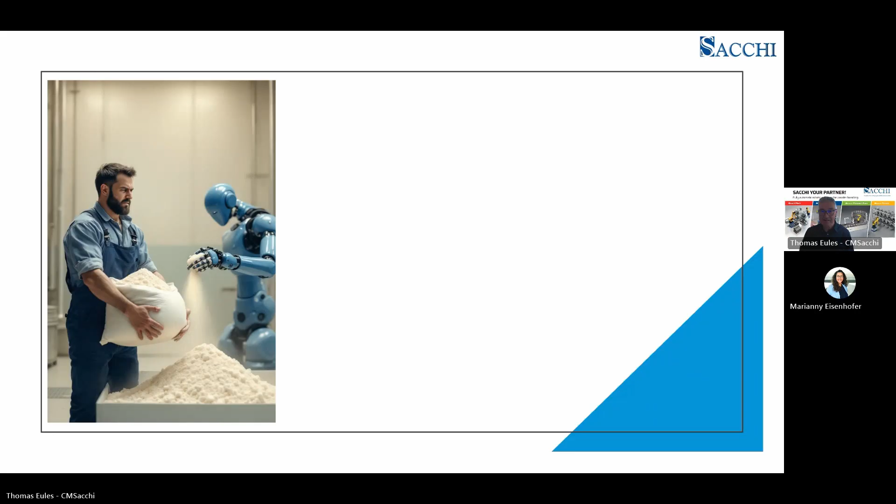Okay, thank you for this introduction. I want to share my screen. Is my screen visible? Is it fine? Can you see my screen? Perfect. We can see the screen. Okay. Thanks. So a very warm welcome also from my side.

Our topic today is AI and robotics in powder handling, from a manual process to a smart factory 4.0. I want to show you how a manual process can go into an automatic process and smart factory 4.0. But first, let me introduce myself a little bit. My name is Thomas Eules. I am business manager at the company Sacchi. I have worked more than 25 years in planning and implementation of process engineering projects in the field of bulk solids.

And let me also introduce the Sacchi company. We are a family business since 1926, so now we celebrate our 100 years anniversary. Now we are in the fifth generation of a family-owned business, so we're very proud. We have specialized in innovative robotic solutions in the field of bulk material handling for over 20 years. We develop, implement, and optimize turnkey plants for the bulk solids processing industry.

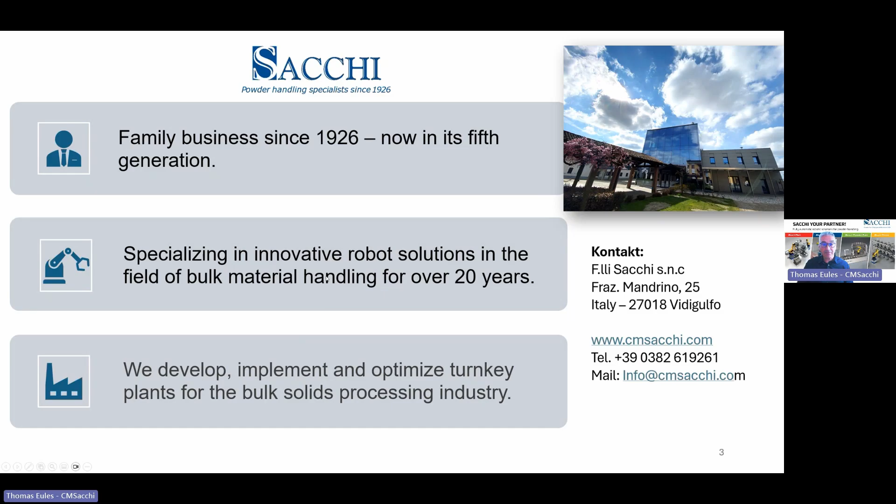Here we have four core systems where we work with robotics. First is Smart Pick: we empty bags automatically. We have a system, Smart Pack, where we can fill bags automatically and palletize in one system. And we can also deal with minor ingredients, micro ingredients, with the systems Smart Powder Flex and Smart Tipping by using our robotic systems.

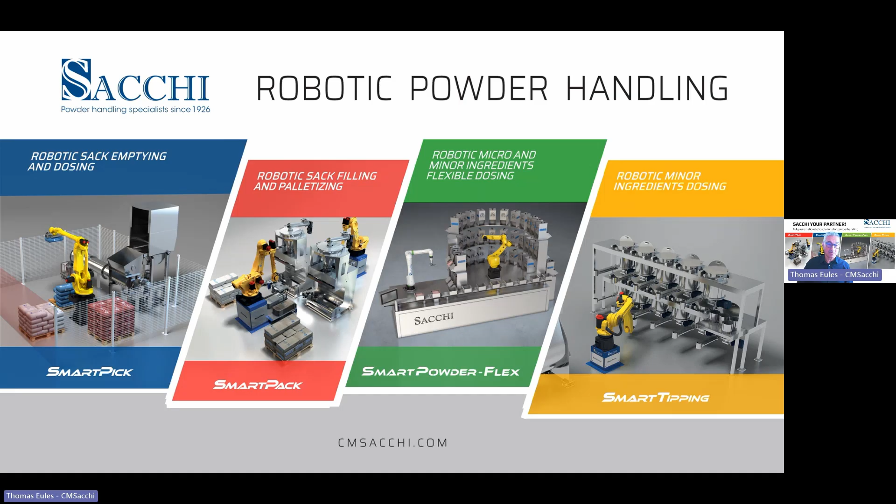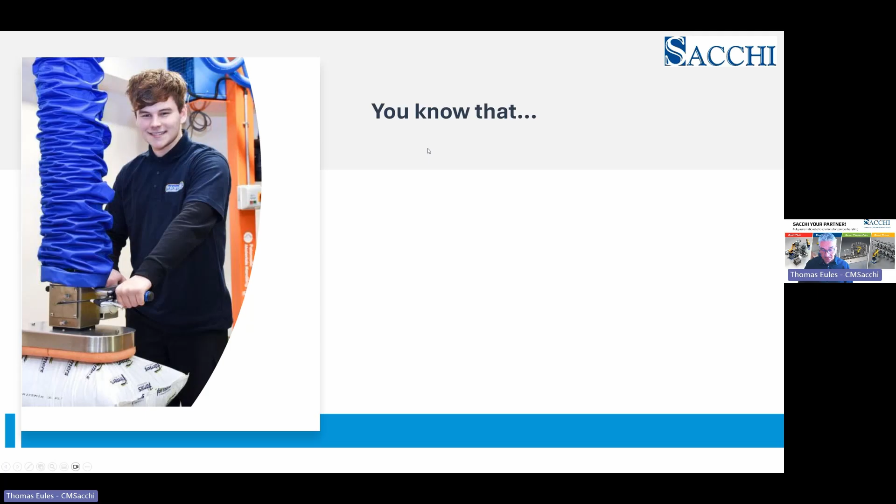But now, efficient and safe powder handling is a major challenge in many industries. Today, I will demonstrate how Sacchi can bring you to Factory 4.0, and we want to use a real application example for a fully automated mixer feeding and mixer emptying. So that is, I think, what everybody knows here. The automotive industry is mostly fully automated. We have halls, sometimes completely dark, to save energy.

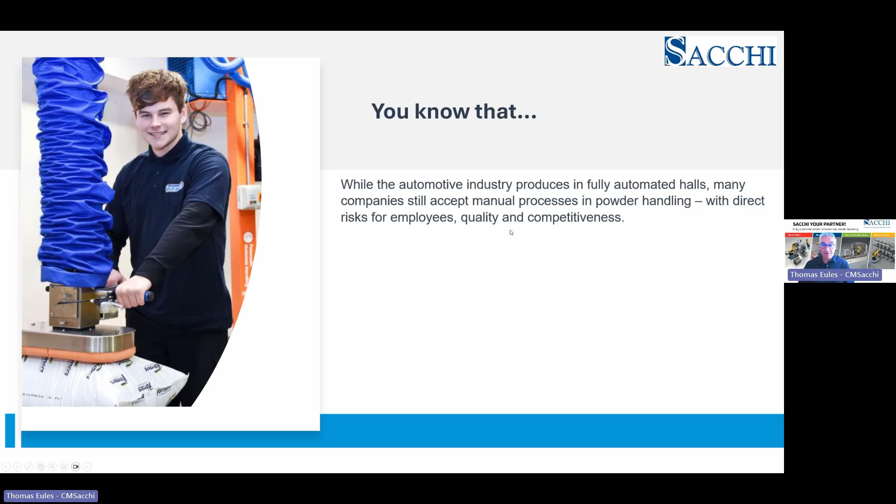But in many processes in our bulk industry, we are using manual powder handling with risks for employees, quality, and competitiveness. Here we have a lot of problems: quality defects, efficiency deficits, and human errors. I think all of what is mentioned here is what you know from your production.

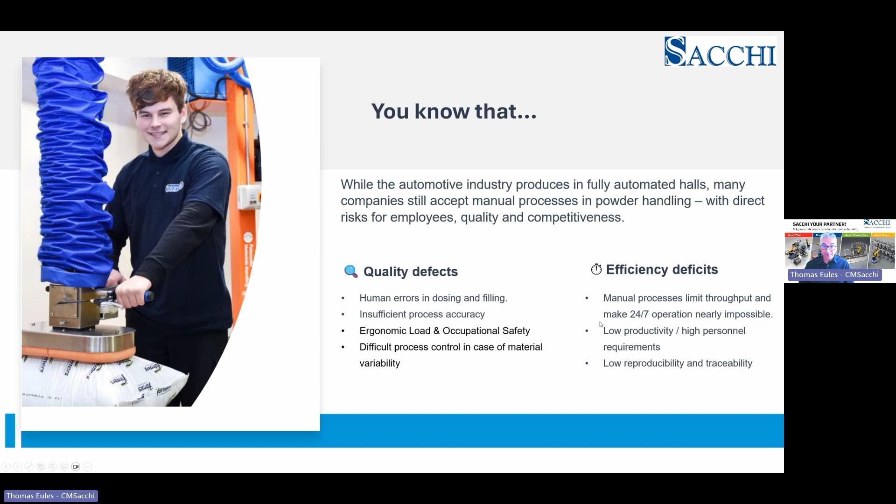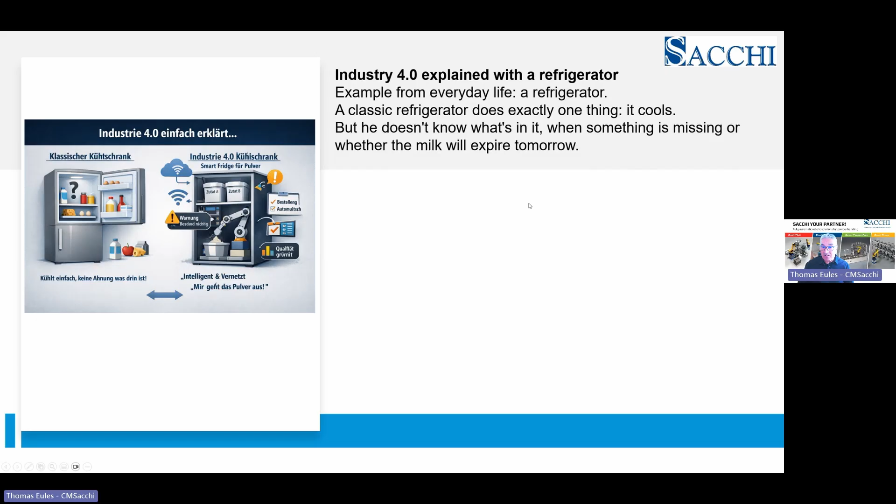As an example for Factory 4.0, I want to use a refrigerator. A refrigerator does exactly what it is constructed for. It cools, but it doesn't know what is inside, if something is missing, like milk, or expires tomorrow. If we had an Industry 4.0 refrigerator, it would automatically detect what we pick. It automatically monitors live temperature and records missing products. So it will talk to us. That is exactly what 4.0 does. So in our industry, it means nothing more than a combination of real production with digital intelligence.

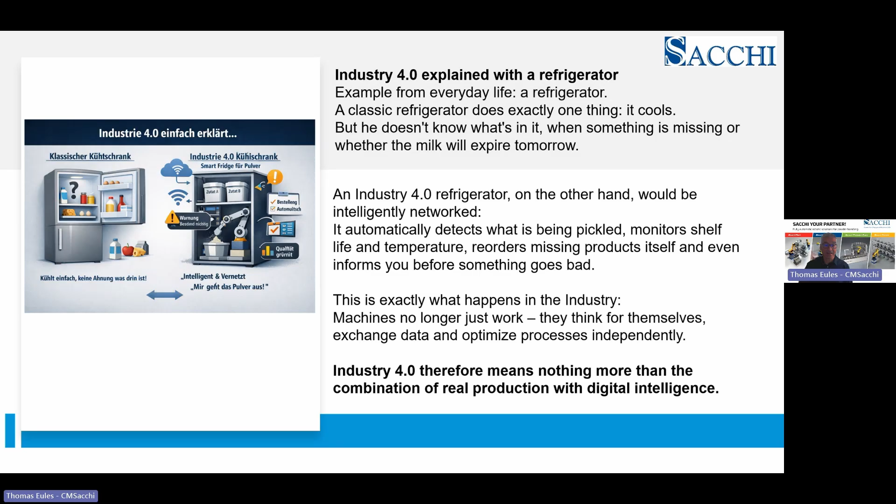Let's look at how AI can support us. Imagine that every batch you want to produce has to be exactly the same quality, a perfect reference batch every time, regardless of external influences such as temperature, humidity, or raw material fluctuations. Here is an example. A human worker will make a coffee sometimes perfectly, sometimes a little stronger, sometimes a little weaker. If we are able to control all this with AI, we can control bean moisture, grind, temperature, and lead time, and ensure that every cup tastes exactly the same. That is what AI does in our powder handling area.

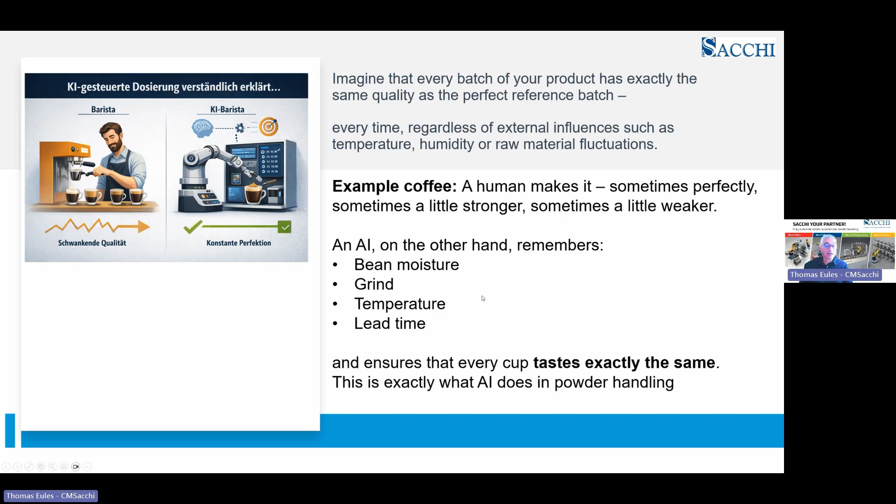And now we're coming to Internet of Things in powder handling. Internet of Things, also simply explained, is if you can imagine that all things around can talk and listen to you. So that is Internet of Things. It will help you.

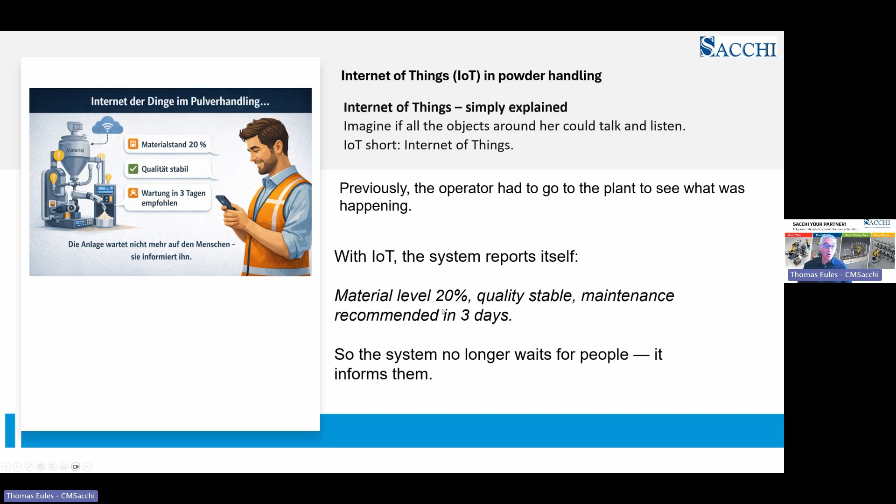In the past, your operator had to go to a machine and check how the machine looks, whether the material level, quality, everything is fine. So now with our IoT, we are able to do also preventive maintenance. We know how the system is at the moment.

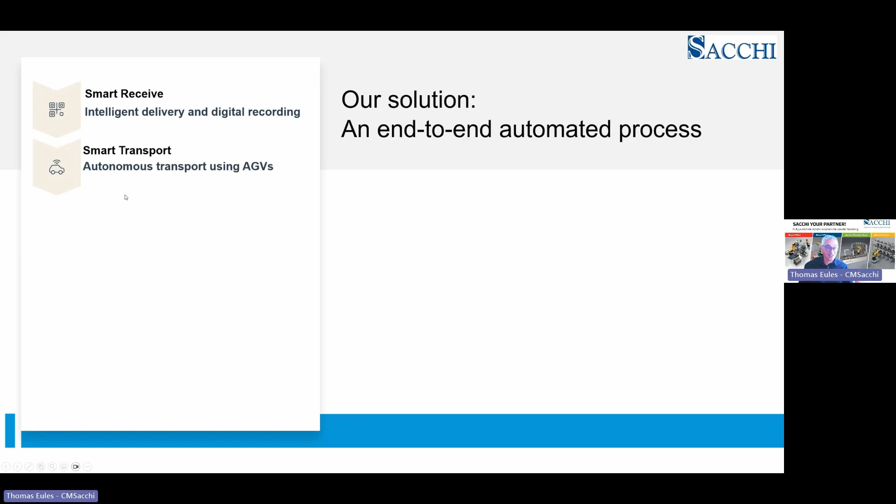So now let's come to a solution, an end-to-end automated process. How could it look? First, we have a smart receive. Our raw material will be received. Then we need a smart transport, mostly to the station where our production is. We need a smart pick, for example. Here I'm using a smart pick, a robot for emptying bags.

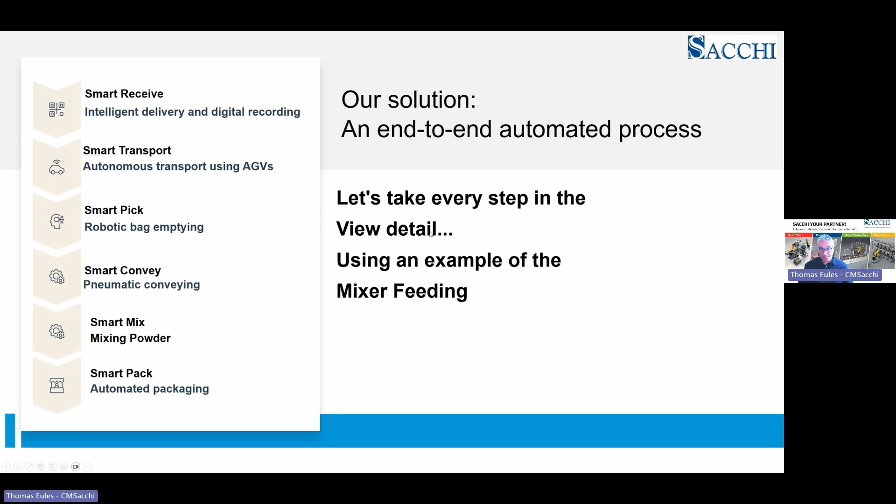We have to convey. My example is a pneumatic conveying system, but we also can use screws or mechanization systems, belts, whatever. We need a smart mix, and sure, now we have to automate packing. So let's look a little bit deeper, step by step, at all these details.

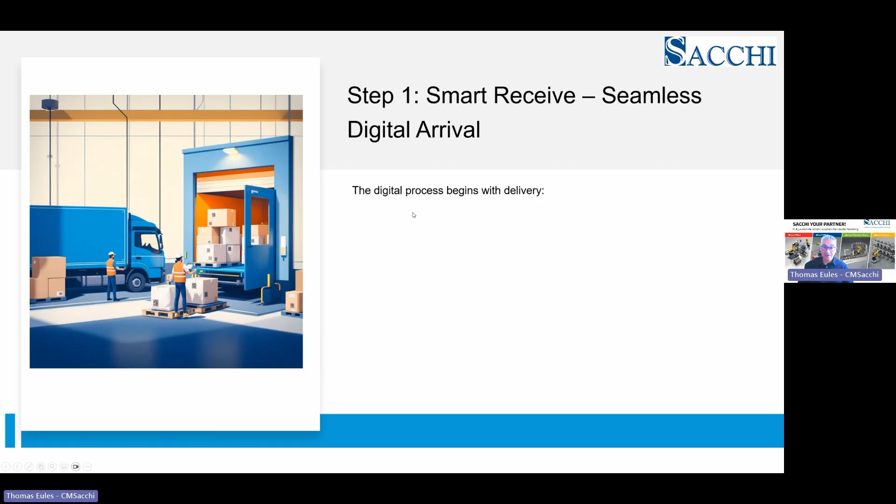So the first step is smart receive, seamless digital arrival. The digital process will begin here. Automatic identification of bags and goods via barcode, RFID tags, immediately recording batch, material, quality, supplier, and time. Then we also can use AI-supported image processing, which checks how our bags look, whether our pallet with bags is damaged or not. Here we can use AI.

Digital integration into the warehouse management system. So when we have this integration, we now have our raw material, let's say, in our system. And we have full traceability, from the first moment our product arrives.

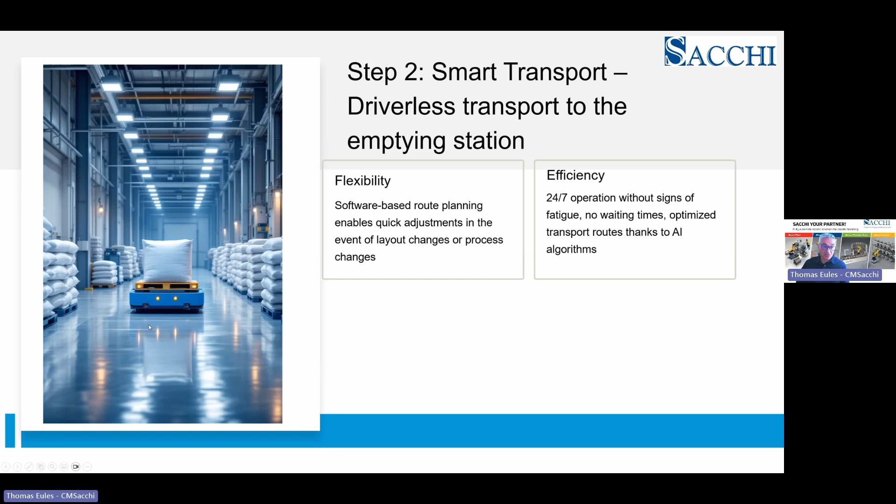Let's look at step 2. Now we have to transport all pallets to the place where our emptying station is. On the market, which is growing, you will find a lot of automatic transport systems. They are flexible, efficient, and really highly secure. The autonomous transport vehicles, AGVs, take over pallet transport contactless to the next station and to our next step.

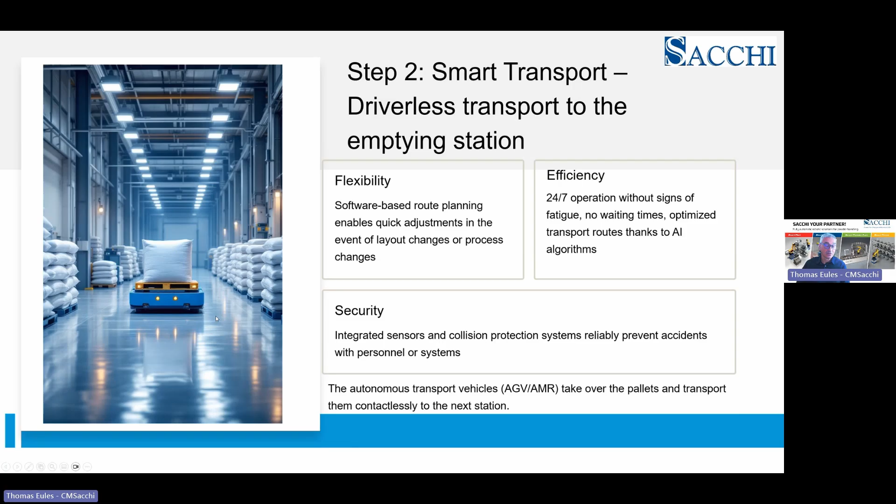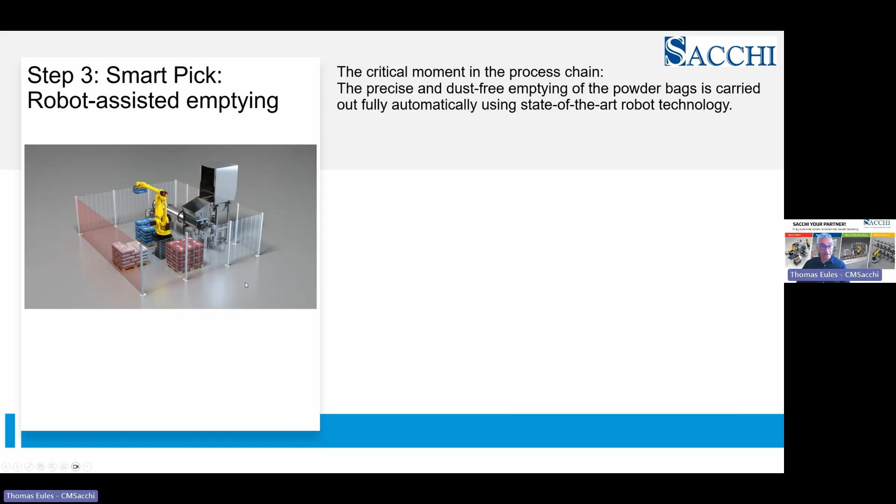Our next step is now we have to empty the bags. That is, let's say, the critical moment in a process chain. Nowadays it's mostly done manually by an operator. But now we need a robot for precisely picking the bag and emptying the bag in the discharge station. Here from Sacchi, we have a patented system with 7 patents, and we pick and place. We open the bag by pressing the bag onto a fixed knife inside the emptying station.

We also can use a 3D vision system, but in most cases we don't need it, because when we pick the bag, we know the weight of the bag. We know that the robot is picking in the right place. Several possibilities, but sometimes we also use a 3D system to detect our bags on a pallet. And sure, we need nearly dust-free emptying, so we have a de-dusting unit on the system.

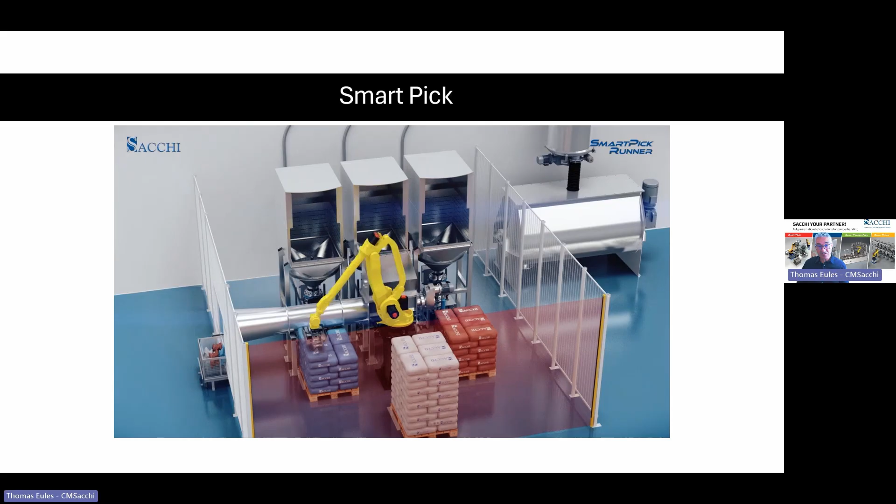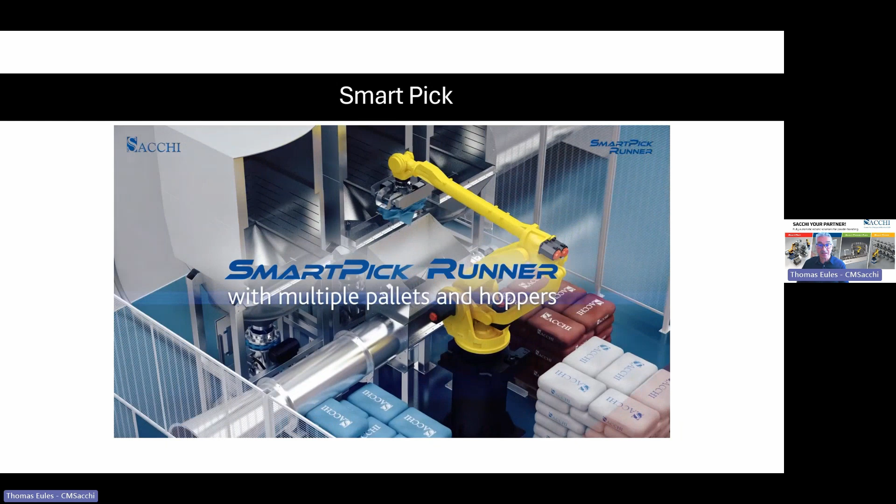I'll just show you here a small video and an example, because our system can grow with your application. At the beginning, we pick and place a bag into the station. You see the blue one goes in blue, the white one in white. We want to avoid cross contamination. In some cases it could be just one station, but here in this example every station is prepared for one product, and it can be extended.

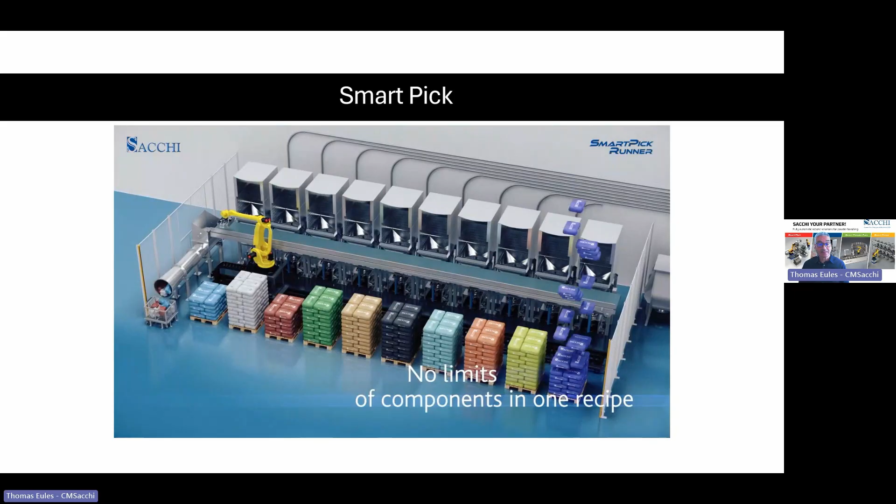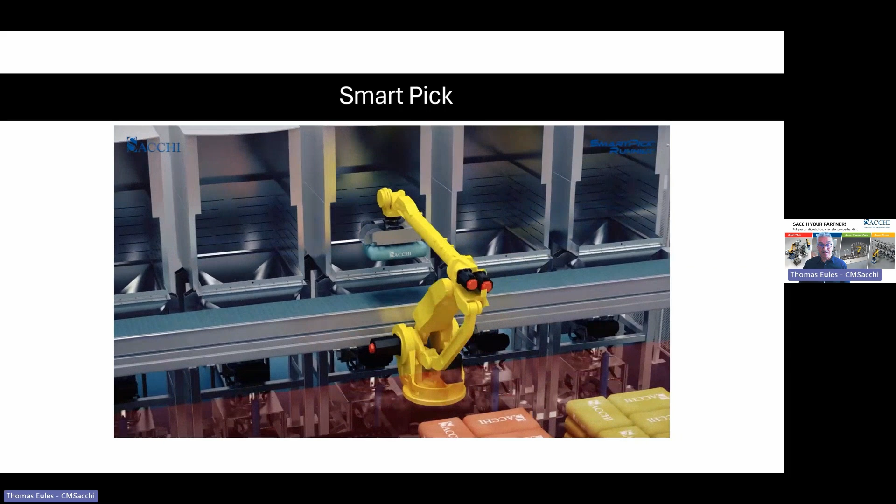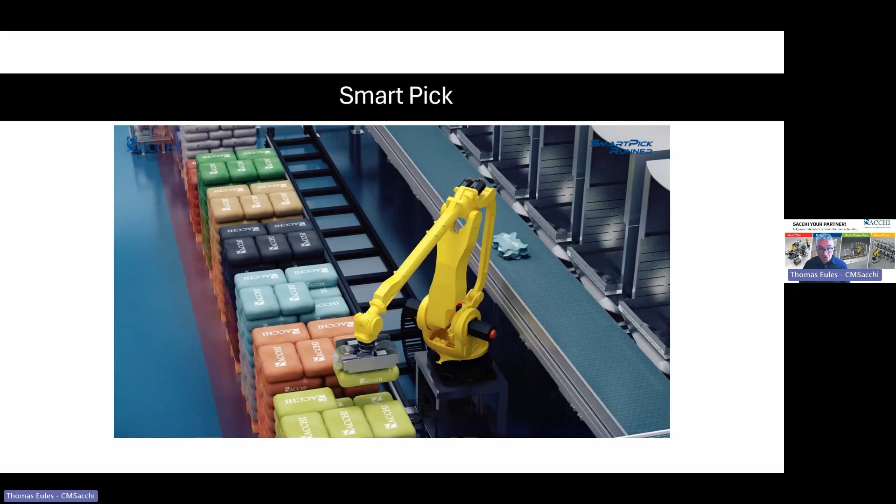If you see now here, maybe here is an example of a recipe. What you want to produce consists of 10 different ingredients. It can be more and it can be less. The robot will pick according to the recipe and empty the bag in our station. When it's emptied, he will put the empty bag, in this case, on a belt. We also can clean the bag before the bag goes into the station. Here we have a system for cleaning bags, and you see we prepare the right recipe.

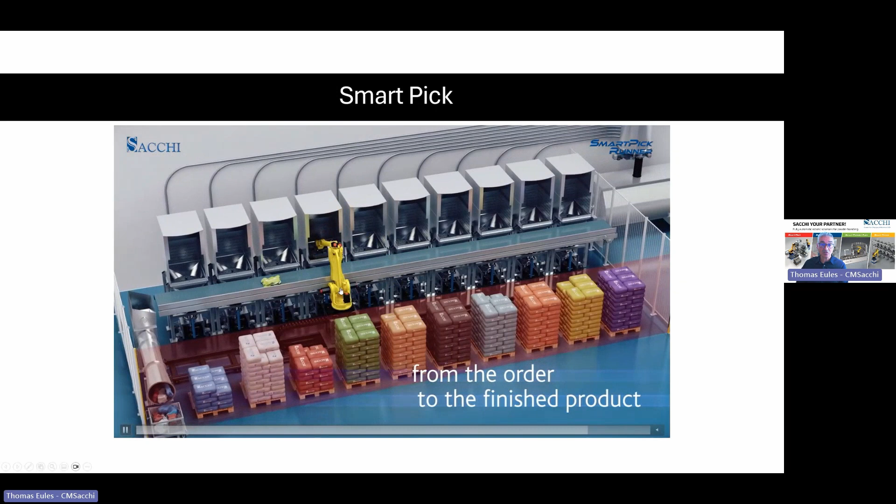In my example here, the combination is with a pneumatic conveying system. So we dose out the amount of the recipe, and it will be pneumatically conveyed into a receiver. The receiver is here, in this case, directly over the mixer. But we also have the possibility to go into a container, in small buffer bins. It depends on your application and your task.

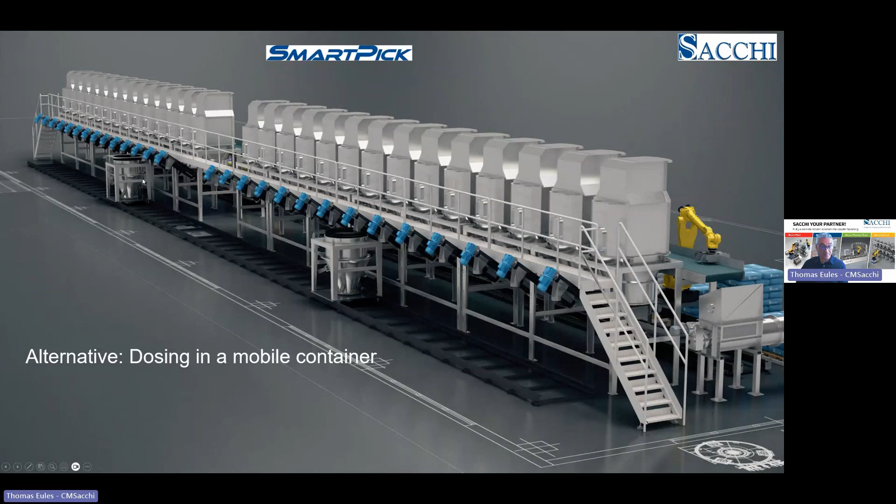The container can go automatically. Here in this case, it will be emptied one level down, where there is a mixer, but the container can also be transported automatically over the mixer if necessary. It's just an example.

And we also have the possibility to empty only full bags. It's sometimes interesting. Here, in that case, a customer prepares the pallets, and he has to change the recipe very flexibly. He produces recipe A, then he has to produce recipe B. Here you need a flexible system and also a system that is cleanable. We are able to do a cleaning in place and drying in case you have to change your recipe.

It could also be a possibility to say, okay, we just empty full bags, but the small quantities we dose over a second system. I give you an example. If you have to dose 104 kilograms, we can say, okay, 4 bags, and the 4 kilograms can be dosed with a different system from Sacchi, Smart Pick, or Smart Tipping.

Now let's come to our pneumatic conveying system. You can use any pneumatic conveying system that fits and can transport your product. You know, there is vacuum, there is overpressure, there is dense phase, or there is dilute phase. You can use, in that case, any system to go over the mixer.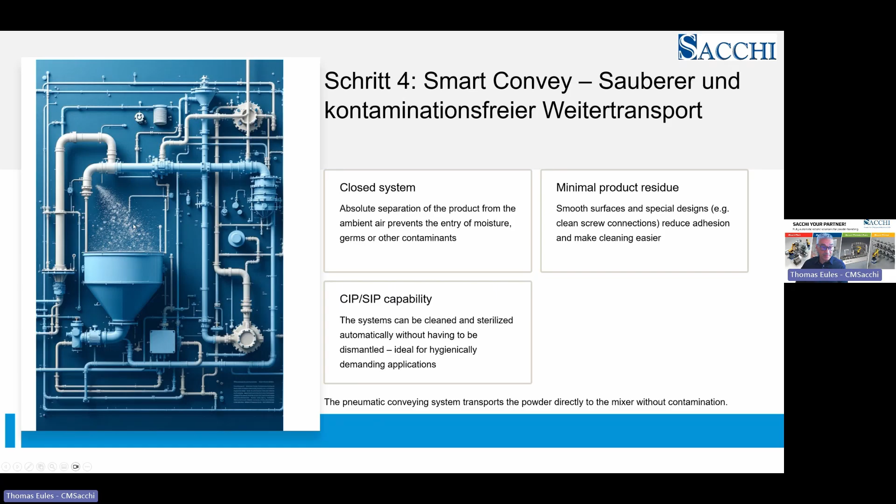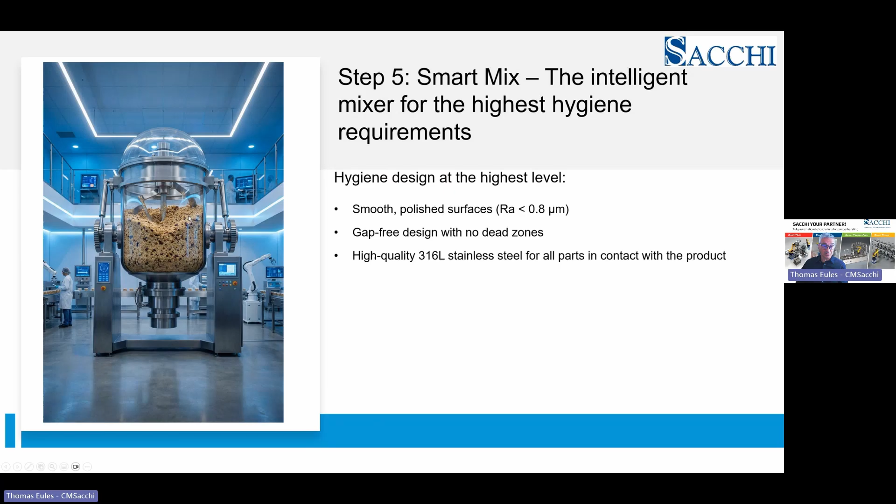And now we have a mixer. You see, my mixer is AI generated, so it is not really a mixer. But what I want to say is you need a hygienic design, because if you want to change product, you have to clean between, and you need AI powered control so that you really know what the temperature is, how the situation is in the mixing process.

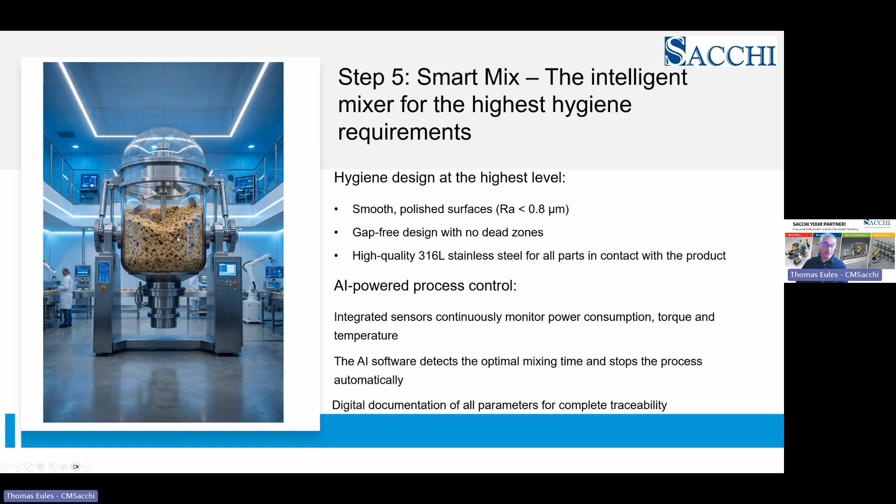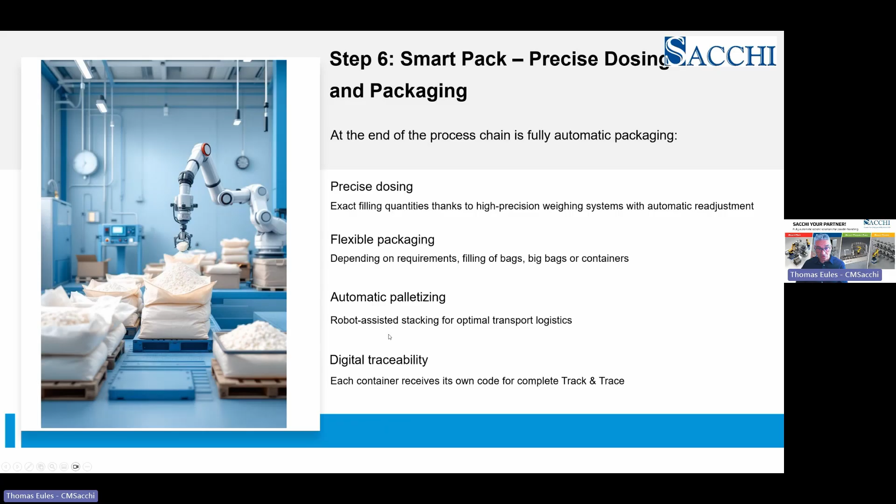And now step 6 is we have to empty the mixer. So here we also need a precise dosing and packing system. We can go directly into the packing system, or mostly you go into a container, in a big bag, and transfer to your packing line. But here I want to show that it could be possible to go directly under the mixer with our system. You need precise dosing, flexible packing, an automatic palletizing system, and digital traceability.

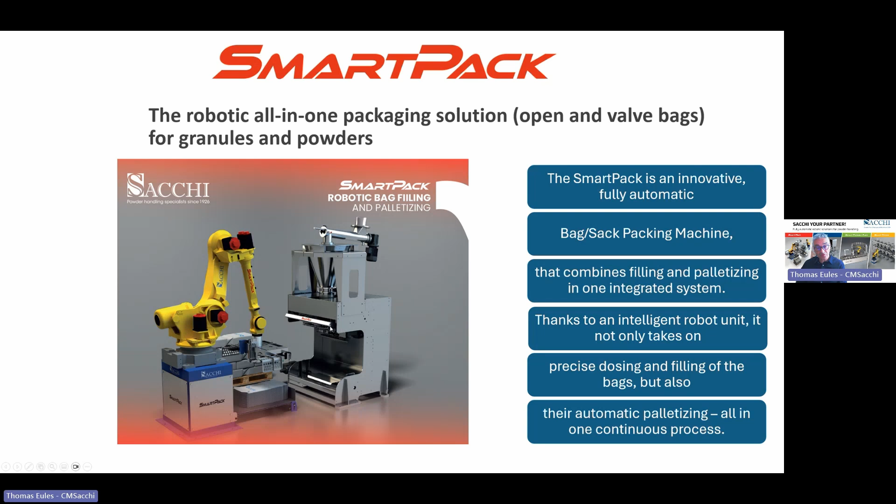We have a system called Smart Pack. The Smart Pack is a robotic all-in-one packing solution for granulates and powders. That means the robot picks the empty bag. It can be an open bag, it can be a valve bag, puts it to the station, and we can weld, sew, and palletize in one system. Here you see an example. Here we have some mixed product that goes into a container. The container is automatically emptied into the system, and our system palletizes.

Another system is in the bakery industry. Here you see that we have a system where the robot picks the bags. The bags will be emptied. In that case, we have a screw. The screw transfers into the mixer. When the product is mixed, we also have a screw and it goes to our Smart Pack and will be automatically filled and packed. So that is a very simple application here in the bakery industry, but you see that you can have everything on one level. That is a big advantage.

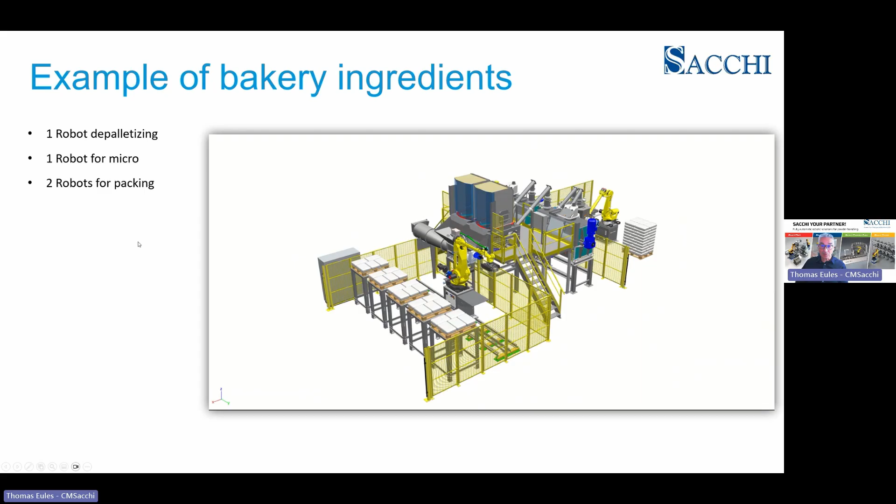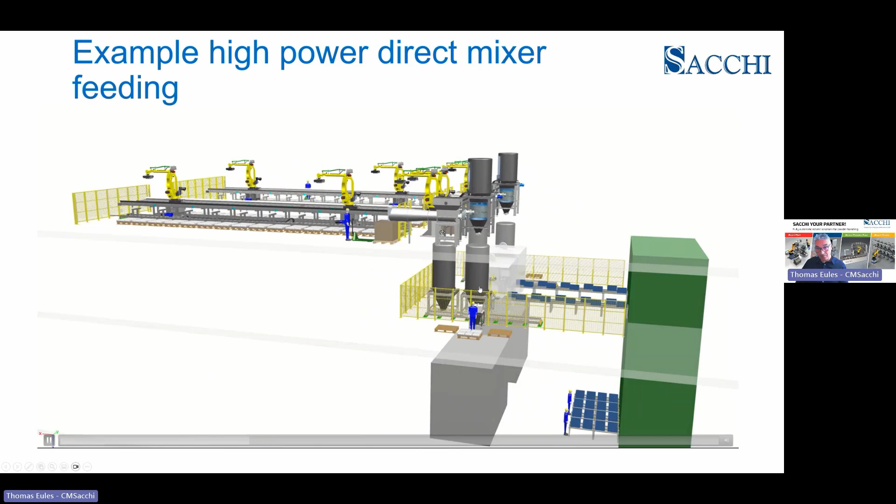And here is another system, because sometimes we have really huge amounts of product that we have to dose into a mixer, because we have to do, for example, 2 or 3 batches per hour. That is why we go directly into a buffer bin. The buffer bin is over the mixer, and so while the mixer is emptying, we reload the buffer over the mixer.

That is if you need a really high capacity in your product, but you are 100% flexible. What it means on recipe, you can very easily change your pallets. So in that case you don't need day silos where you put in your product, where you store, where you're dosing. That is fully automated.

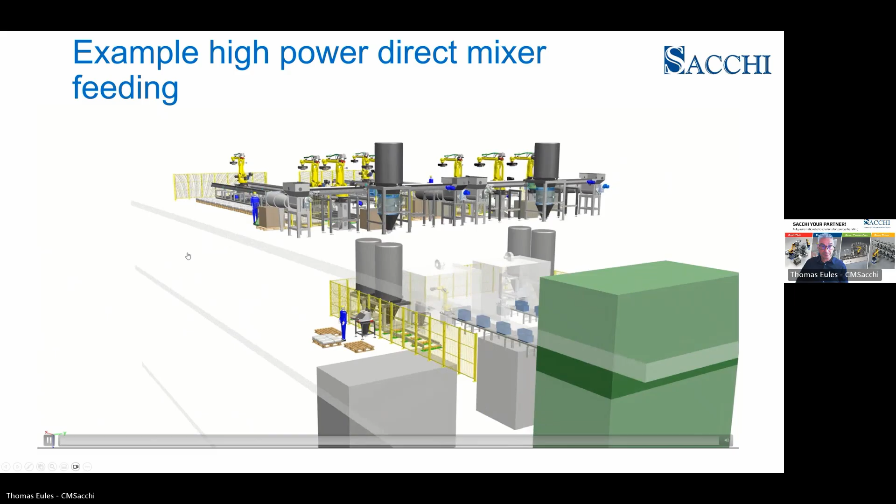And now step 6 is that we need a control, the intelligent control system. It's, let's say, our brain. We have IoT data and AI. Everything has to be combined in the system. So we need a central working IoT infrastructure.

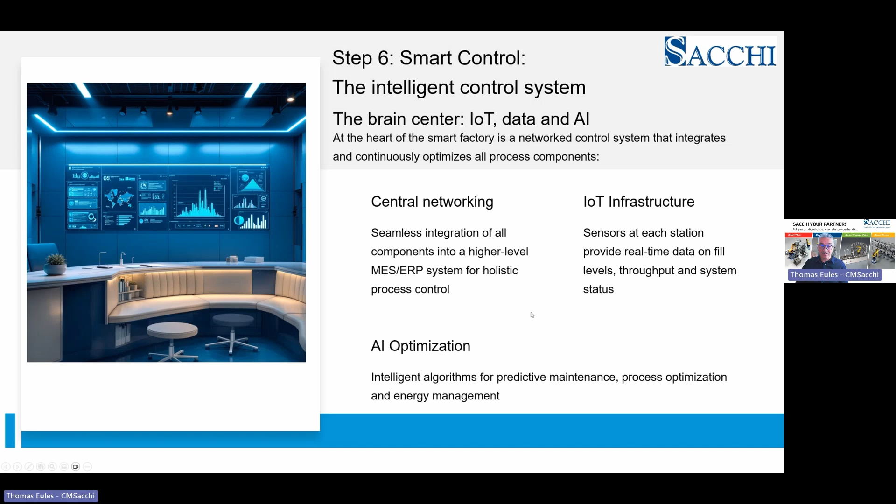You see, that is now very important, that all data come together in one centralized system. We have intelligent algorithms for predictive maintenance, process optimization, and energy management.

Now I come to the conclusion. Bag open, mix, bag closed. The Smart Factory 4.0 in powder processing is now technically and economically feasible.

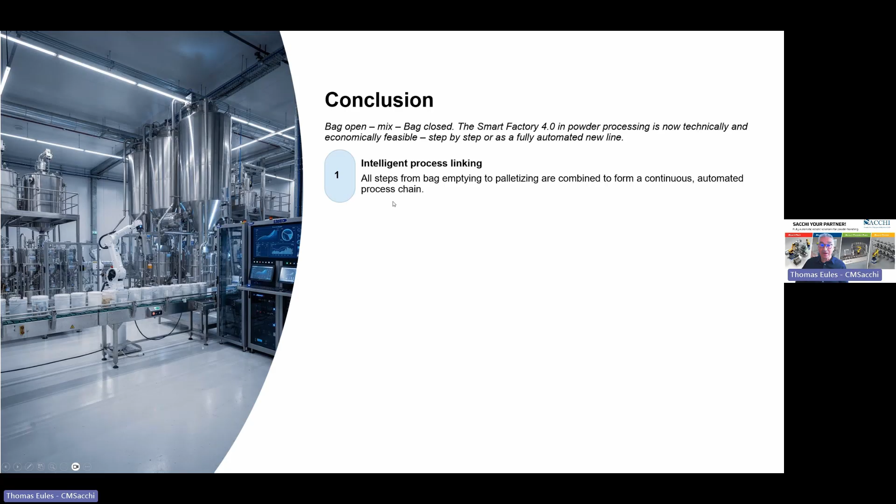Step by step, or a fully automated new line, you have an intelligent process linking. That is what you need. You need an end-to-end automatization. Manual intervention should be reduced to a minimum.

You need a digital networking in real time. You need a modular, flexible system architecture. A new generation of production, efficient, flexible, and future ready for companies.

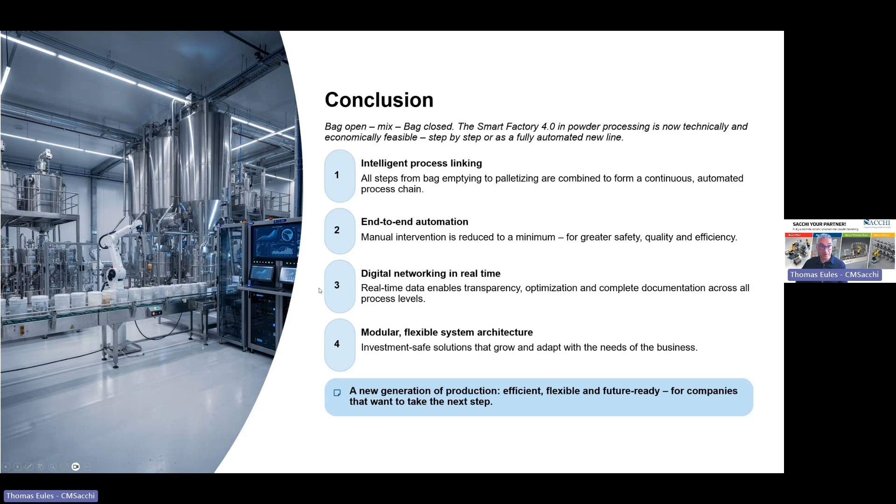That is what we can now take in the next step. So we will support you on the way to the Smart Factory 4.0 in the field of powder handling. We would be quite happy if you send us your task and what you want to do to come to a fully automated production line. That was the moment.

I am at the end from my side, and I am still available if you have some questions.

My name is Philipp Pahl. I'm working for Maschinenfabrik Gustav Eirich, where I'm responsible for our digital products and services. Today I want to give you an overview, not only about the products and services, but also about the system and the approach to AI in the bulk material industry in general.

Not only what we do, but which trends or which market needs we've seen over the last years.

First of all, I'd like to talk shortly about Eirich, also known from the PowTech trade fair - some of you may have seen Eirich before. We have 160 years of experience in mechanical and plant engineering, and we're mainly famous for mixers in wide variations of industries like concrete, ceramics, lithium-ion batteries, fertilizers, and everywhere you want to handle raw material in homogenizing, drying, granulating - different steps of processes. This is where we originally come from at Eirich.

This is the trend in the market I mentioned. We've seen over the last 4 to 5 years that plants - not only from Eirich, but also from our customer fields in general - generate more and more data. On the other hand, we see more and more very experienced operators retiring. We have the challenge of finding operators with the experience to maintain stable production and stable process parameters, and not only in Germany - worldwide we see the trend that handling operators and plants stably is becoming more and more challenging.

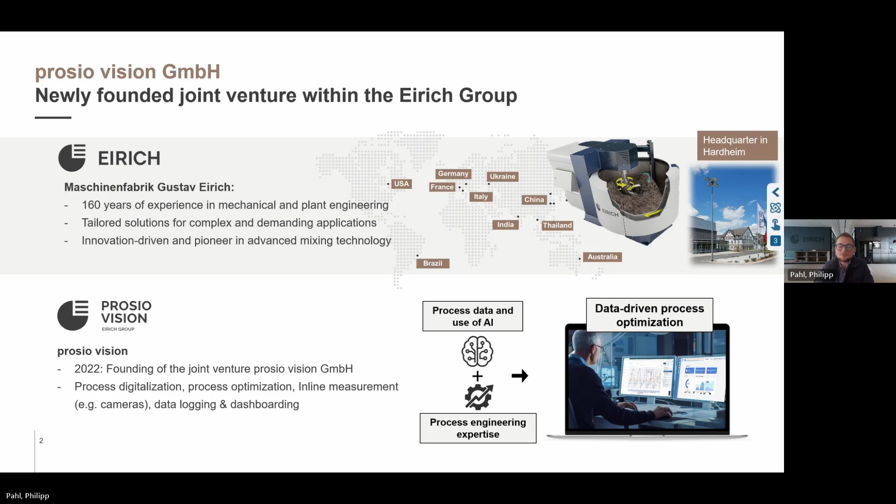How do we do that? That's the question now. For today, I want to give you a short agenda: the introduction I already did, then the potential of digitalization in general, and at the end - I think the most practical and most helpful part - the use cases, what we did with our approaches and what the results were.

As I mentioned, the Eirich group comes mainly from mixers, with patents from the 1900s, and this is where we're building up the markets. Where we see the need, mainly from Eirich plants, is especially with the personnel situation - our customers have problems finding new operators on one hand, and handling the data on the other hand, especially for small companies. When you want to improve productivity, save money, or generally have problems with plant stability, there are companies who don't have the capacity to handle the data, and this is where we start.

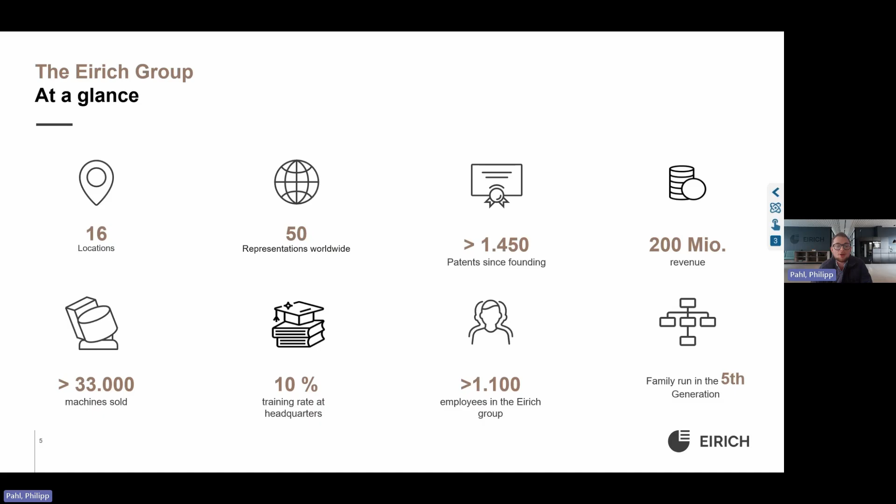Some key facts from Eirich: 16 locations and 50 worldwide representations, 33,000 machines sold. And now we come to process digitalization.

People and know-how will retire. So we will see the trend that the people who are in front of the plant, operating the process, their know-how is the most valuable thing in some cases we have. And there we have the challenge to make this know-how assisted by assistance systems, closed loops, and data in general, to make the human know-how into data know-how and to have more tools to make the stability, savings and reductions in the plant.

How do we do that? We mainly work with dashboards. So we have centralized data, centralized visualization, and one important thing: we provide real-time data, because we also see many customers having their process, having the data, and at the end, maybe after drying, maybe after post-processing, if you adjust, then it's too late. So we set the focus on real-time data.

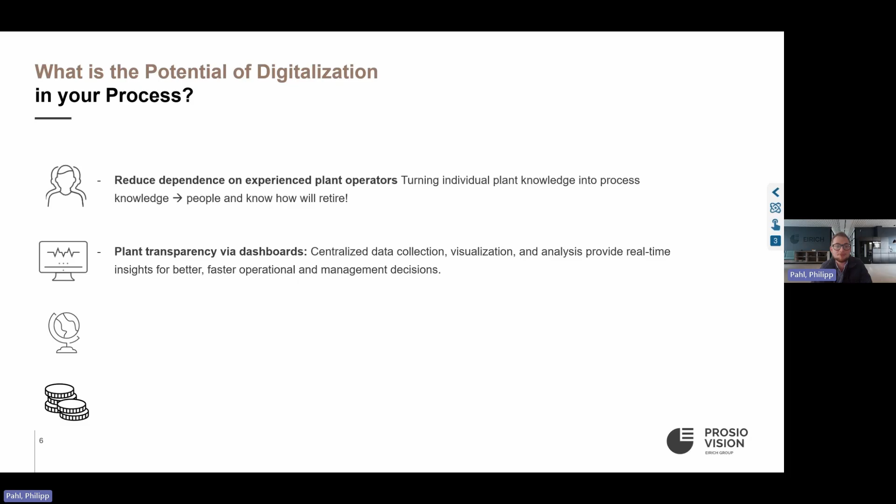Of course, what we see in terms of batch time, taking samples. There are many processes, or some processes, with taking the samples manually. Therefore you need a human being, and therefore you need time. So we also set the focus on reducing the batch time, which at the end, all of these points reduce scrap and rework. The early detection I mentioned and the adjustments right in time make your process better.

How is our approach? We create a data foundation. First of all, as long as you cannot measure this data, for example with sensors, temperature, pressure, cameras, you're not able to control anything. That's why we start with a database and with the situation on site at the customer, what is usable and what data are there. We have the possibility to optionally build or implement more sensors, but first of all we see what's there in terms of investment costs and make one database.

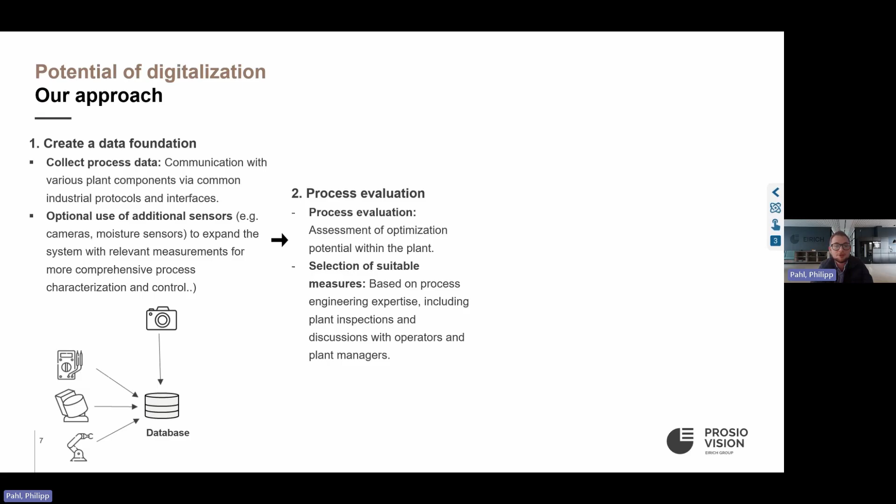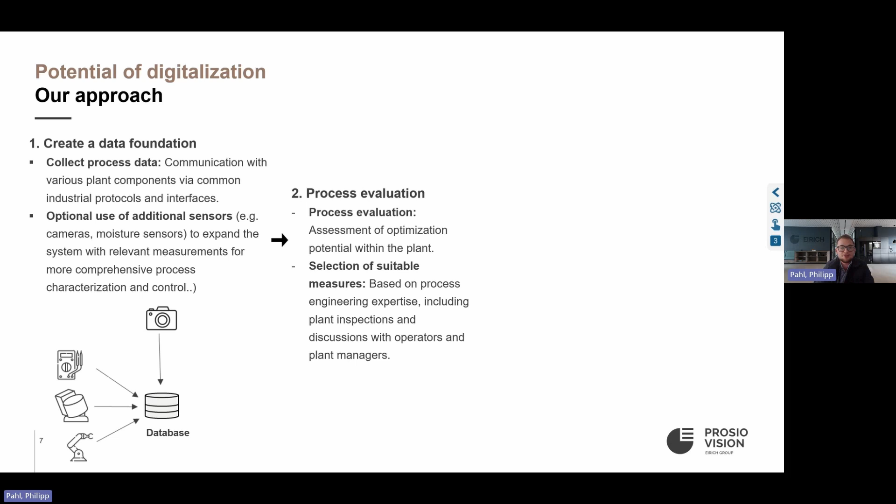And then this is the one thing about AI and the experience we made. Collecting the data is one thing, visualizing is the other thing, but the evaluation of the process, how the material is behaving, which data you want to compare, where you get the result from—this is the challenge we have on our side with the process engineering know-how. That's why we work mainly with process engineers and not only with programmers, so that we can set the focus at the end on plant-specific optimization with the two disciplines: process engineering, process know-how, and the software, the data and AI part.

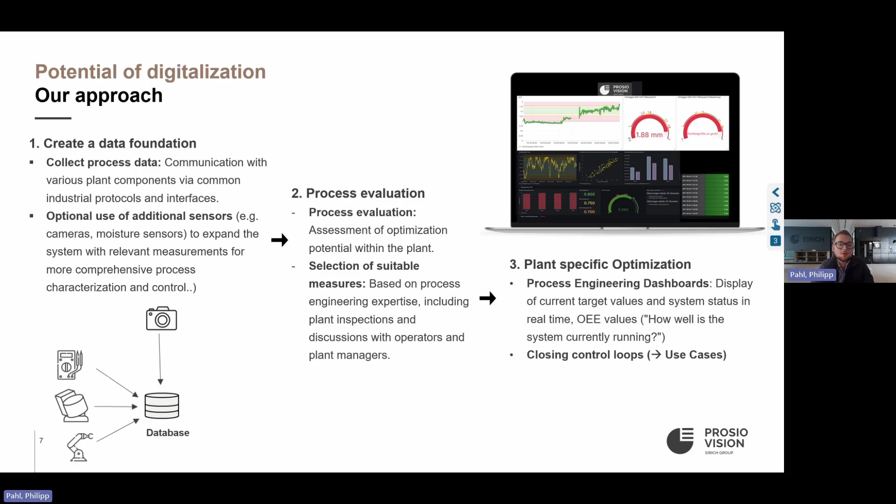And visualizing is the other thing. At the end, which is the main goal for processes, we have the goal of making closed control loops, which we'll see later on in a use case.

From measured values to process understanding: what we see today is that operators see the signals in a SCADA system, in the control system, where they have trends, alarms, individual values. In control systems from some years before, you have experience-based reactions. You see the data, for example in concrete, fertilizer, bulk material industry in general. You see the data in your control, but the reaction—how to add the amount or which amount of water or liquid, how to set the temperatures—this is in most cases experience-based. And this is also a point and a risk for the next years, because you're dependent on this experience.

In the first step, we make these systems and processes understandable and visible, mainly with a dashboard, to have the long-term goal of a closed loop, where it's not only experience-based but also supported by assistance systems—for example with the performance of the plant, or suggestions for the amount of water or liquids to add. On one hand, process engineers, on the other hand algorithms we teach, and with this experience from the head of the operator, we want to make it digital with an algorithm to have closed loops.

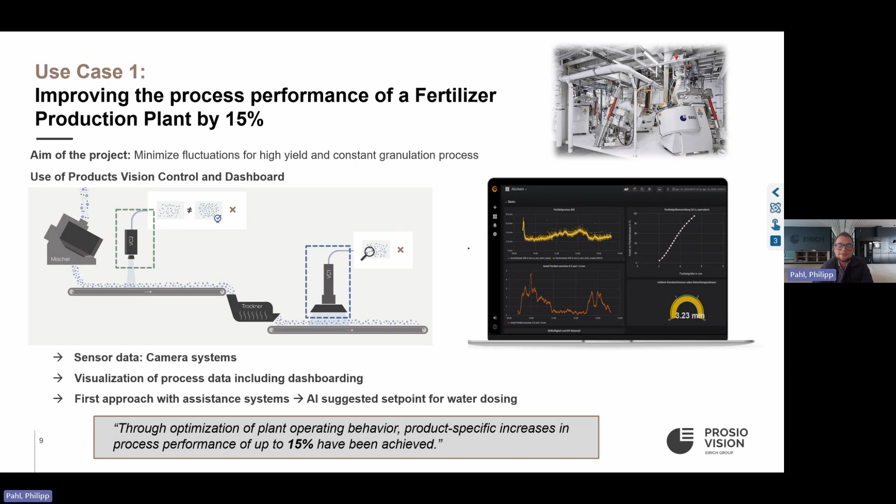To go a bit more into detail, how we centralize the data: process digitalization with the measurement of relevant parameters, these cameras. So as you can see here on the right-hand side, this is nothing else than a sensor. We also use temperature and pressure sensors to build up one centralized database, also depending on what is already implemented in the customer's plant. And therefore, this is the base for us for the main additional value improving.

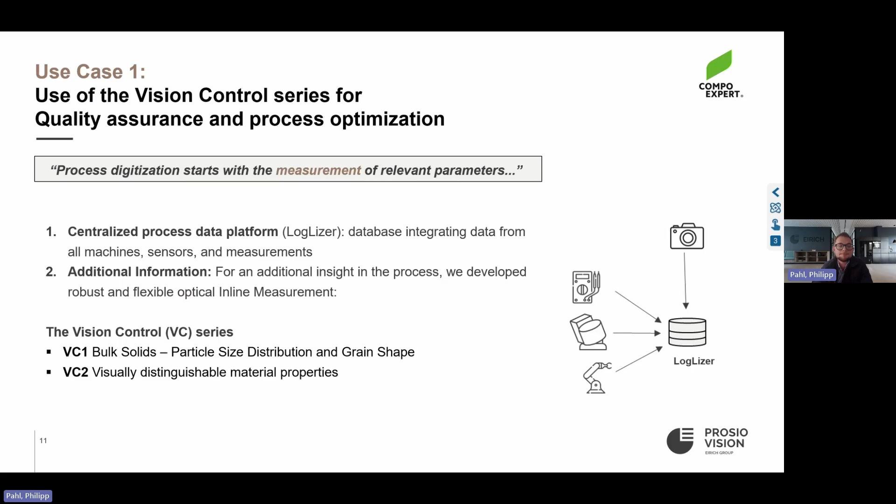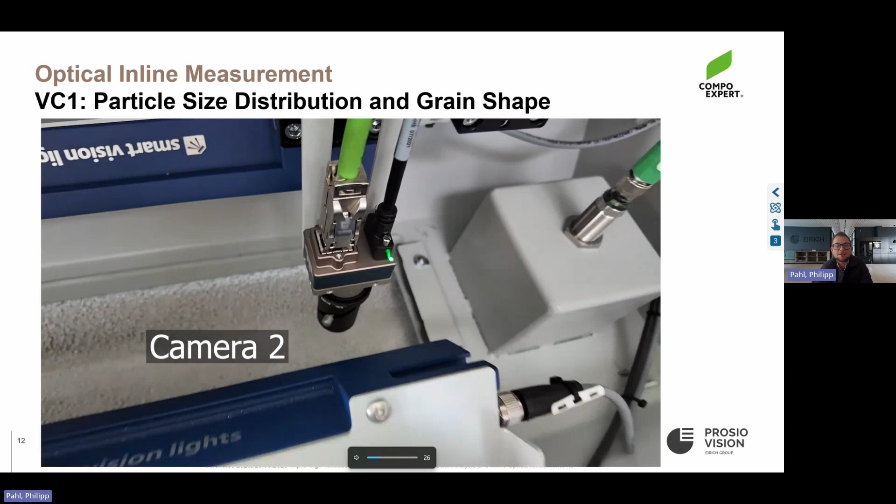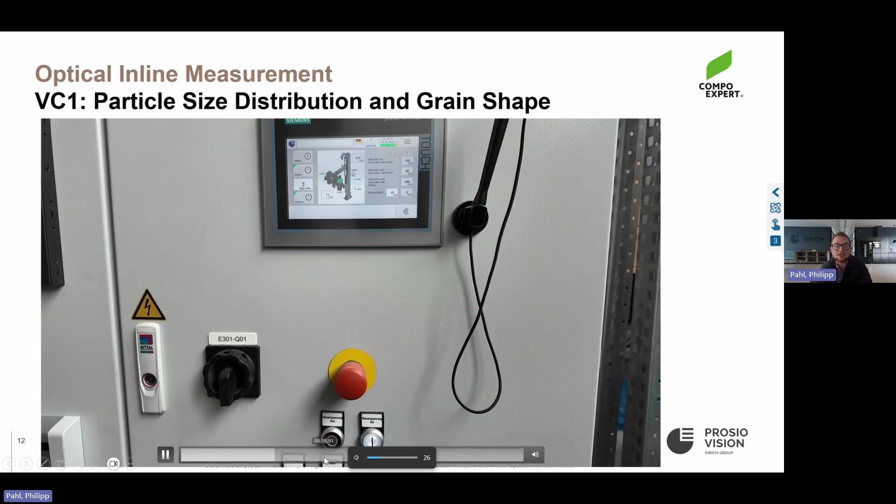Here we see a short situation, just as an interest, how the camera system in this case looks like above the conveyor belt. So we have moving cameras up there, implemented with lights, and this is how it looks with a prototype in this video. So the camera follows the speed of the product, and therefore I think the result is the most important. Therefore, visualizing the results. Oh, sorry.

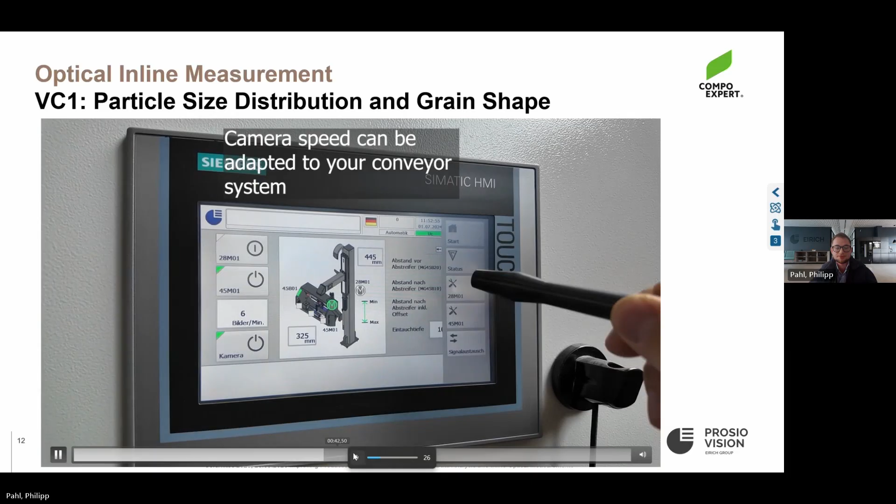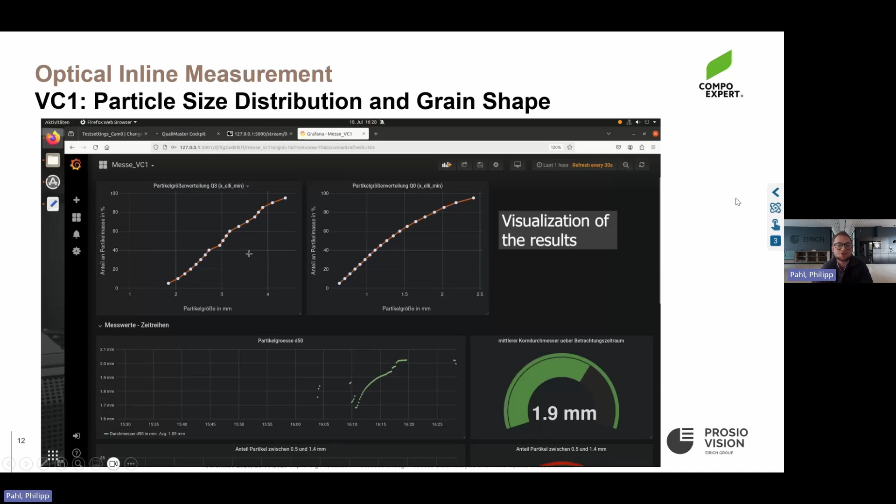Yeah, this is the point where I wanted to. So we have direct pictures of the material, and we say what the eyes of the operator can detect, the camera can detect as well. And then the view of both cameras and the visualization. So the particle size distribution, the size in general, and the amount of particles in a range. For example, if you say I want to have the output range between 1 and 2 millimeters, you can detect the trend here.

Here we have an example how it looks in production. So not that clean as in the beginning, but it works 24/7, and therefore this is an important message to our customers. But for AI in general, we come with the message that we don't want to replace operators. We're not there for replacing.

We're there for supporting. So as long as we have, for example, cameras in our plant, these data support the operator, for example, or if you're changing shifts, how was the performance of shift 1 compared with shift 2? So we want to support the people, but we will, for now, not replace any operator. And this is an important message for AI as well when you have products and services to go to the market.

We also have possibilities to not only measure but to compare different pictures, with a large language model to say about the material in general, is it too dry, is it too moist, depending on the values, the black-white values of the pictures, which is also an approach we did before.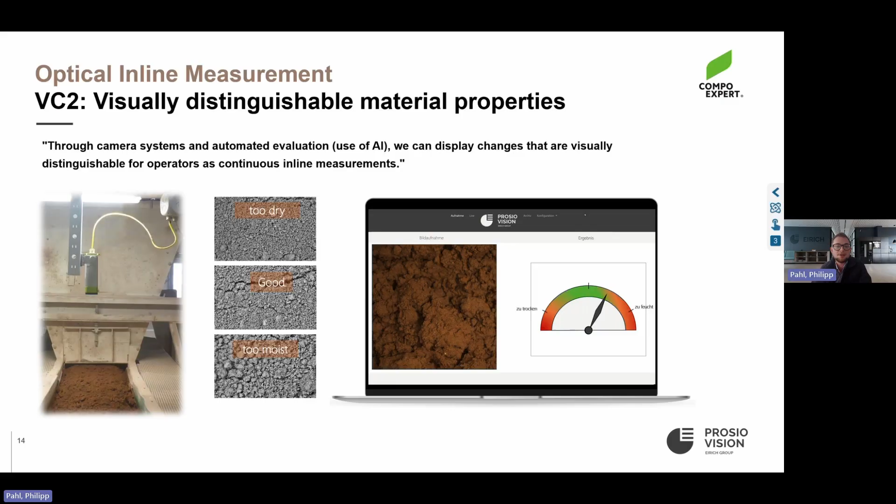So it's also possible not only with concrete but with other particles like sands. It's possible with the color for kind of every material.

And use case 3, which is not a whole plant in the very first moment, as in use case 1, and which is not a research and development project for the color. Plant 3 is for implementing these cameras right in a mixer. So we implemented the camera to detect the product characteristics right in the mixer. Therefore, we have the challenge with dust, with pressure, and with a lot of other conditions, but it's possible.

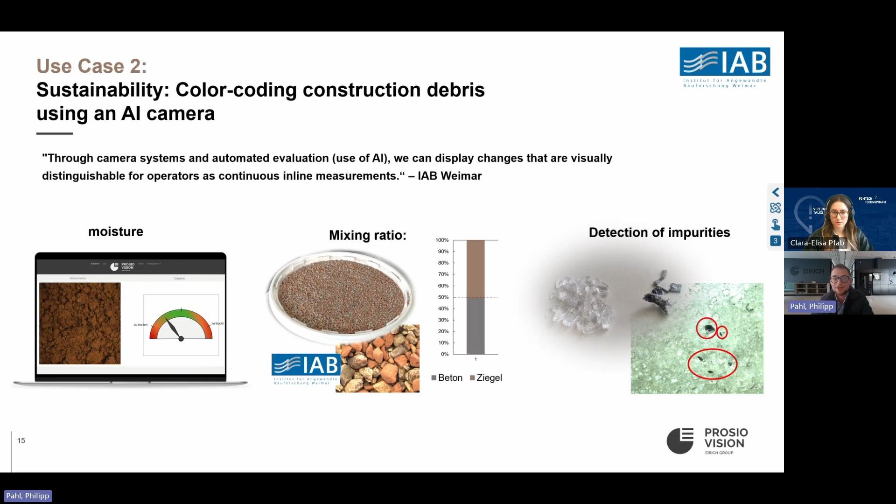To do that with Grafana, it's not AI, that's right. But to make a picture and to have the information about the particle sizes, there's more behind than only Grafana. Perfect. So I hope this answered the question. If not, you can also get in contact with Philipp afterwards and discuss much more about this topic.

So I will ask you one last question. How will the field of artificial intelligence in bulk material handling evolve over the next 3 years? What do you think? That's a good question. I'm not a fortune teller, but I think we will have more and more upcoming companies on the market providing software, and the market with private use AI. Everyone knows ChatGPT or something, so people are not that ready anymore to pay for that. So you really have to focus on the additional value you have.

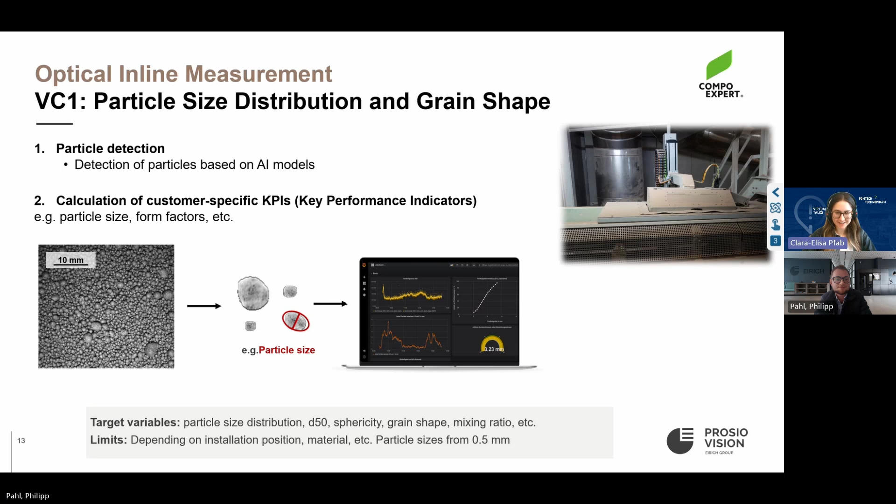So let's start with the next talk, and also the last talk for today. I will hand over to Sebastian Pohl from Greif Velox, who will show you how data and AI are transforming packaging machinery and driving efficiency and availability in packaging 4.0. So Sebastian, your turn. Have fun.

Perfect. All right. Good morning from my end. And you can also maybe turn on your video so we see you as a person. Sorry. Yeah, now, perfect. Perfect. So, all right. Good morning again.

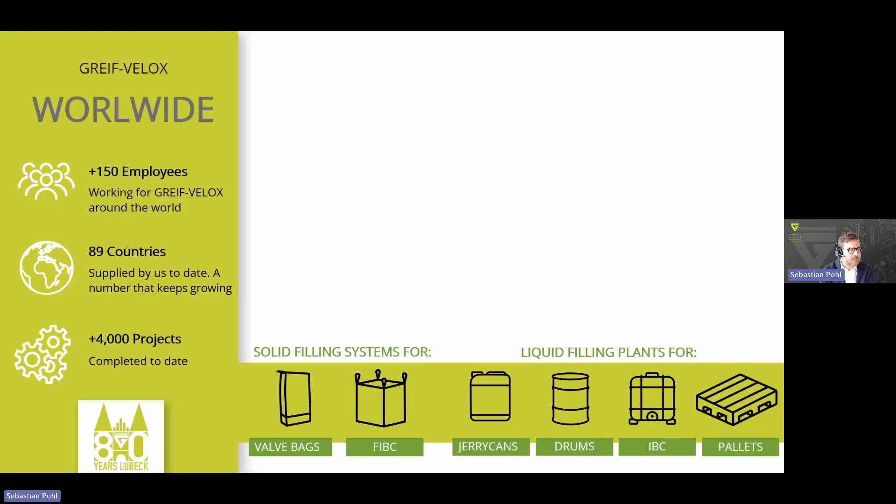Today I would like to talk about how to leverage AI, or what we can do to leverage AI to improve your packaging. And before we go right into the topic, I would like to introduce our company to you. We are Greif Velox, a worldwide manufacturer of bagging and liquid filling machines. So you will find Greif Velox gear in each and every plant in the chemical industry or the food industry, where they are bagging dry solid products like powders into valve bags and FIBCs, or where they are filling liquid products into jerrycans, drums, or IBCs.

Okay, but today I would like to talk about the latest trends in AI and IoT when it comes to packaging. And I would like to give you some real-world examples how we are leveraging AI and IoT to improve the packaging of our customers.

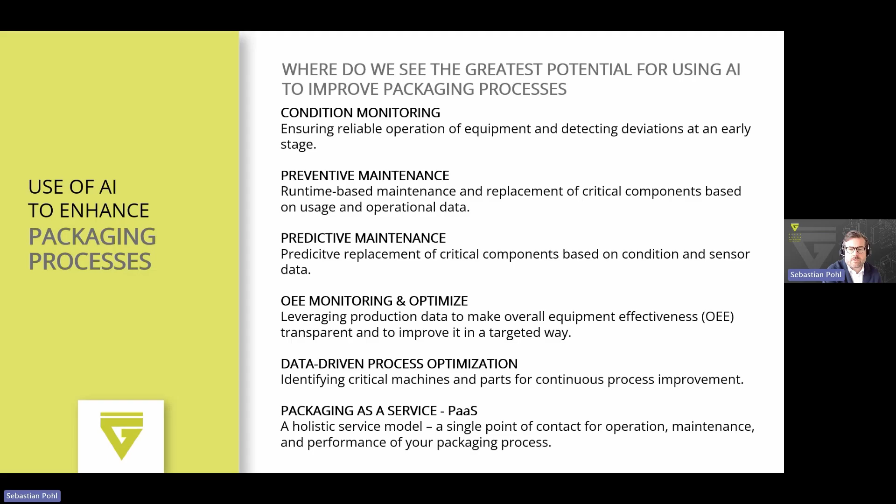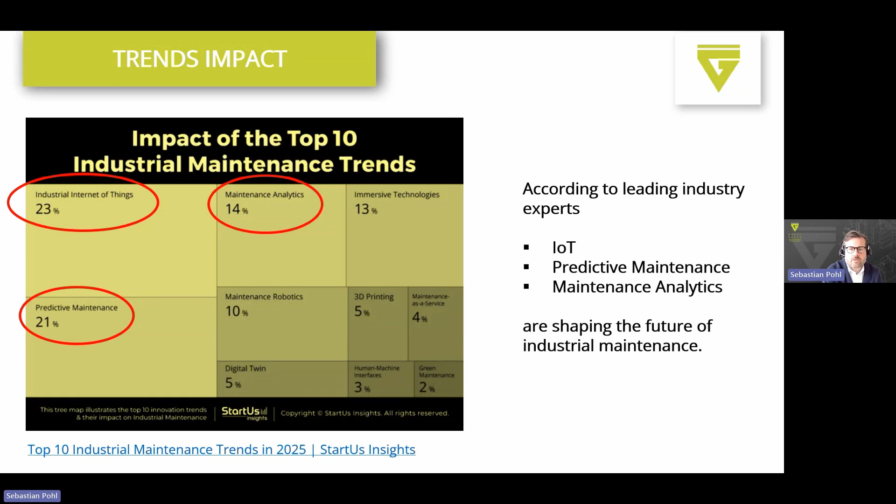If you do look into the industry and run some research among all our industries, the top trends, or where the leading experts are looking into, this is IoT, predictive maintenance, and maintenance analytics. So those are the topics which will create the biggest momentum in the very near future.

And why is this important? Because you can all imagine, if a bag leaks or if a bag breaks, you have to stop the process, you have to clean it up, you have to bring in new bags and restart the process. So on the one hand side, the customer is losing time for the cleaning, the customer is losing product due to the leakage, and what's even more important is the customer is losing process reliability, because as you all know from your production processes, a continuous and stable process is the most accurate one.

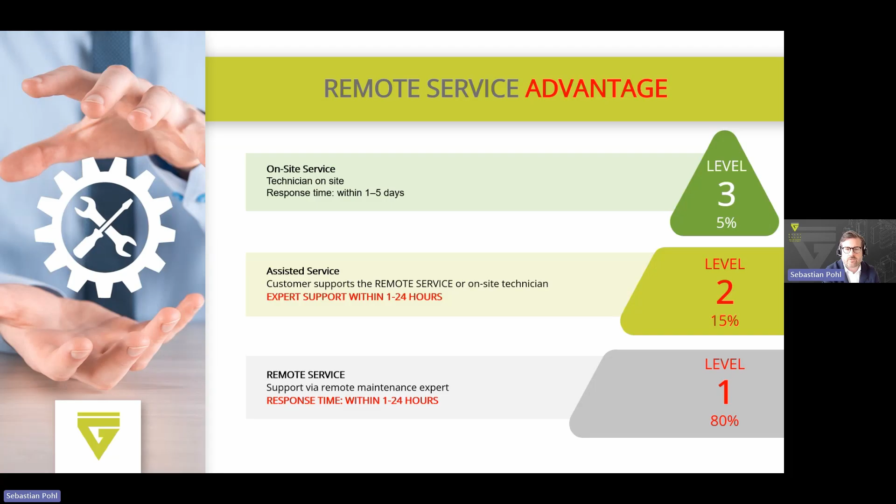We can securely hook up with the machines in the field and really enable the teams on site to solve the issues without travel, without time delay. So like you can see here, typically 95% of all upcoming service or support requests can be resolved within the first 24 hours.

If we go further into predictive maintenance, we did talk to a lot of clients to find out where the benefits are. So what is the benefit of a predictive maintenance program? In a nutshell, this is all about making maintenance plannable and making it more cost efficient.

So predictive maintenance enables you to reduce your downtime because you can detect failures early before they appear. And if it's plannable, you can do it without a breakdown and without all the costs needed for cleaning and unscheduled personnel you might need.

It's very cost efficient if you use AI to plan your maintenance, because this enables you to reduce your operational costs, because you only exchange the parts and pieces which are coming to the end of lifetime and which need to be changed before you are losing performance or actually creating a failure. So very cost efficient on the one hand in the service, on the other hand in the parts.

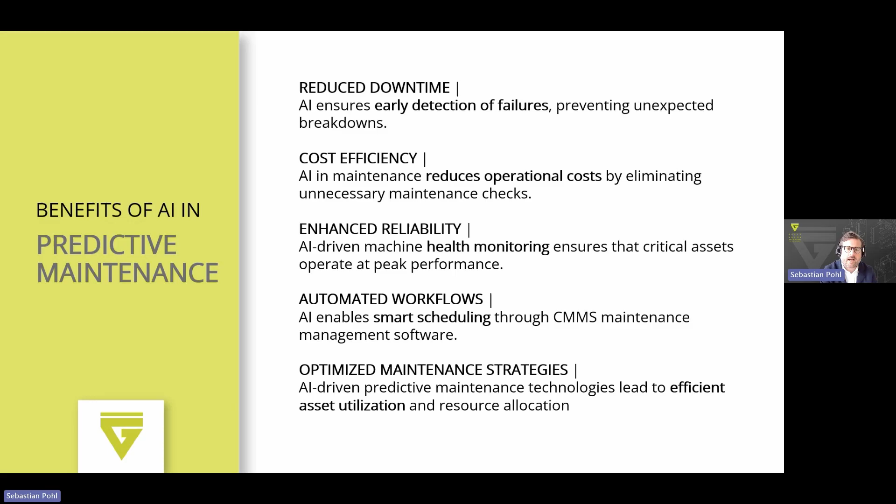Based on all this data a customer can generate, you can automate workflows for service and maintenance and optimize your maintenance strategies, because parts only need to be replaced when it comes to an end of service time, or when the data generated by the parts, the measurements we can take from certain parts in the machine, send a signal that maintenance is necessary. And again, the biggest momentum you can generate is by making maintenance plannable and doing it outside of your high utilization production times.

What is actually the impact of the improvement given by predictive maintenance? Within just 5 months, you can reduce your common failures up to 75%. And this is not data which we are only building up as a sales promise. This is data generated from studies across the industry. So there's a very big potential in implementing predictive maintenance programs for your manufacturing.

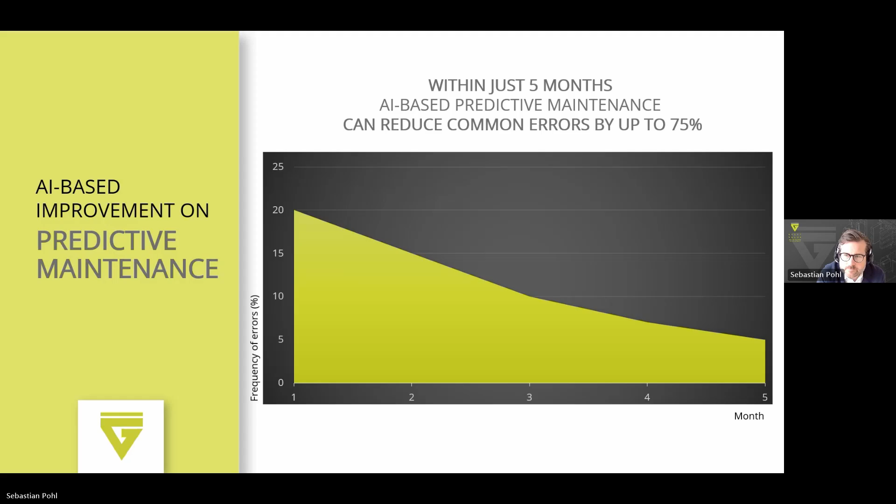So we can measure the wear, because when the wear goes up, the airflow goes up through this flap, and so we can tell the customer when this flap needs to be replaced, when they need to order the spare parts, and incident-based, they can plan their maintenance on the sealings of the inlet flap. Whenever the customer is just replacing the sealing of the flap, they can prevent breaking the whole flap, which gives them a second advantage: downtime can be shorter, and the whole maintenance costs are lower, because not the whole component, just the sealing needs to be replaced.

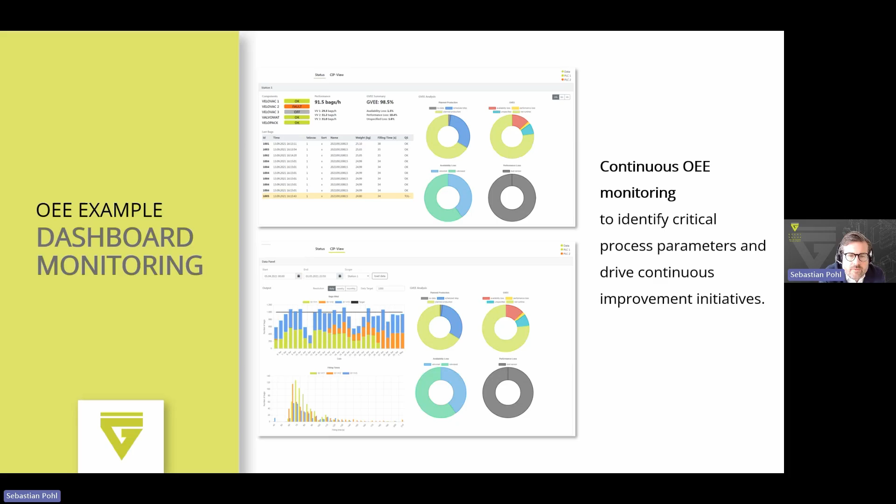So it's not just the whole machine, it's also possible to break it down into the important parts and pieces of the machine and identify the most critical and most influential parts of the machine to really improve the maintenance schedule of your machine.

We will take this further. So what is next, and how can we really leverage AI and data to improve the bagging process of our customers? I would like to give you a little example of something we are working on, which will be there in the near future.

This is a bag quality control device, and as I explained to you at the very beginning of the presentation, if you really want to achieve a great packaging result, you need to bring together the container, the product, and the bagging machine. And with this bag testing station, you can run an assessment of the paper bag. By running an assessment of the paper bag, the bag is checked on air permeability, on leakage, on performance under vacuum, and also on firmness of the bag.

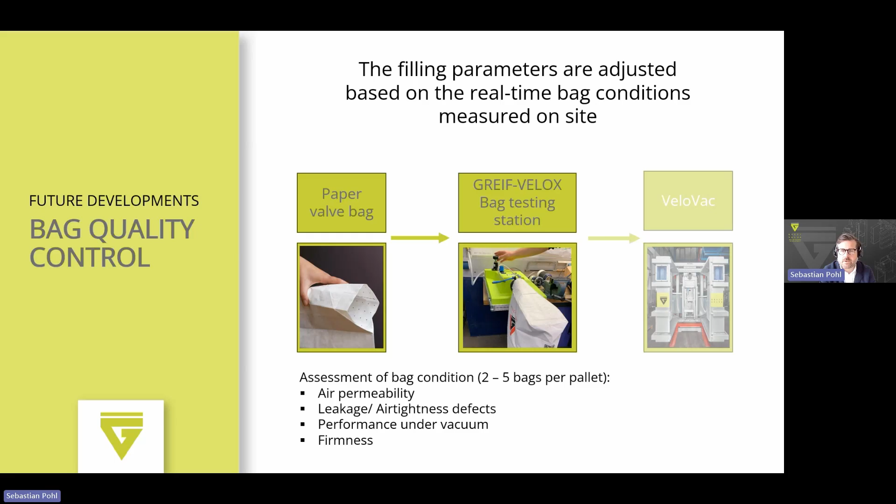By generating this data with our bag test station and submitting it to the VeloVac filling station, we are able to adjust the bagging station based on every new pallet of paper bags the customer brings to their process. This might vary from time to time, as the bags are also made automatically, and there's a tolerance and a spec - as long as the bags are in tolerance, they will work. But bringing together product, machine, and container enables you to really improve your bagging results.

Last but not least, bringing together all the tools I've shown you, we will be able to launch our Velo Expert program in the third quarter of 2026. In this program, we will allow our clients to bring together all the necessary parts and pieces - real-time condition monitoring, remote maintenance, predictive maintenance, and inventory management for consumables and spare parts. Because with all the data we can generate from the bagging process, this enables the customer to get all the data in one place, which is the Velo Expert program.

Perfect, so let's start with the first question: how far has the industry really come when it comes to data-driven maintenance?

I think we are just at the beginning to really understand what the power of data-driven maintenance is. What we do see more and more, and what we appreciate, is that everybody is working on and interested in data-driven maintenance. The most important point from my view is that the industry, our clients, do allow us to work with the data. To answer your question, we are just in the beginning, but we are making big steps because everybody sees, or starts to see, the benefit.

Yeah, I understand, perfect. And another question is: are we already at the point where machines can anticipate problems, or are most companies still reacting too late?

Good question. I think it always depends on how far you are with understanding your process. So, for example, using the little example I gave in my presentation - yes, we as Greif Velox are at a point where we have identified some of the failures which might make a big impact, and we are working on making those visible and predictive. So I think this is exactly the path we are on at the moment.